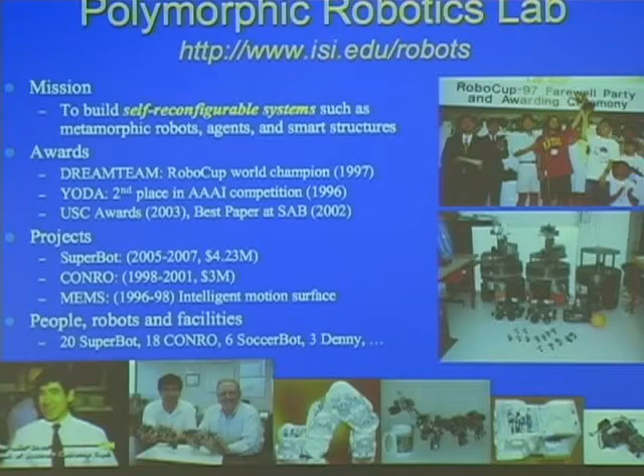In the past we've done some interesting work. One example, shown in the picture, the middle guy is a robot we call YODA that does indoor navigation. In 1996, it showed up in Alan Alda's Scientific American Frontiers by winning 2nd place in a national robotics competition.

This medium-sized one is the soccer robot series - autonomous systems that play soccer against each other. In 1997, our team, which we called Dream Team, won the World Championship in Nagoya, Japan. I'm going to show you a short movie of that.

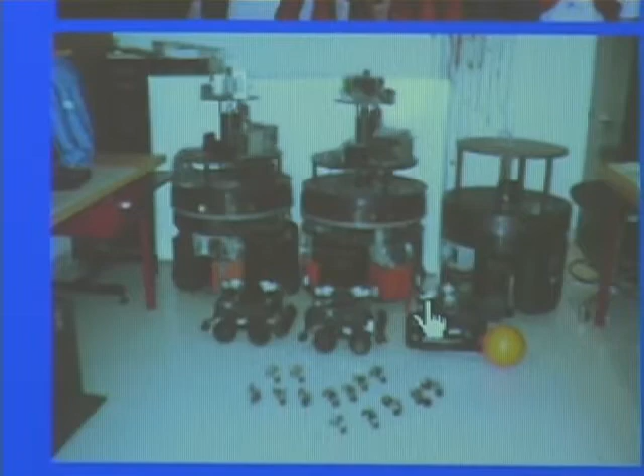The little guys are the reconfigurable modules, an early version, and then we have a bigger one, which is the one you see on the table.

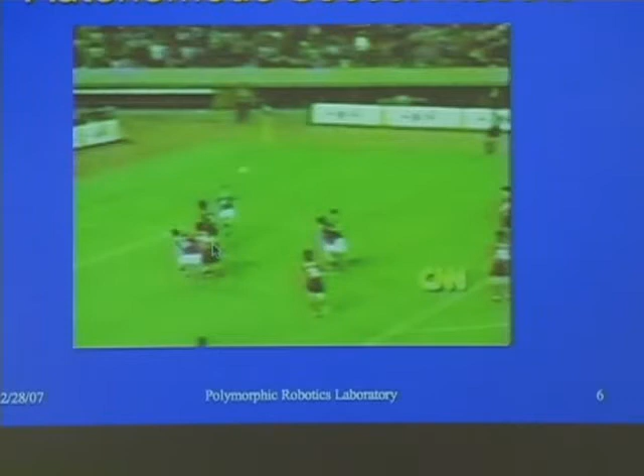So first, the soccer robots. Do we have sound? I figure Google should have everything here. Yeah, that last one, thanks. You might want to start over again. Yeah, that's as high as I can get.

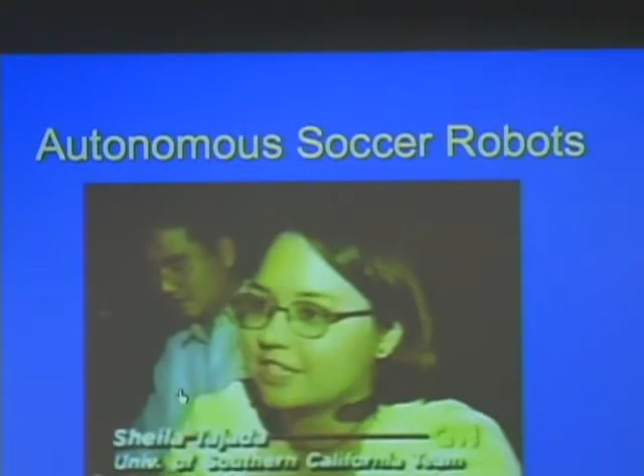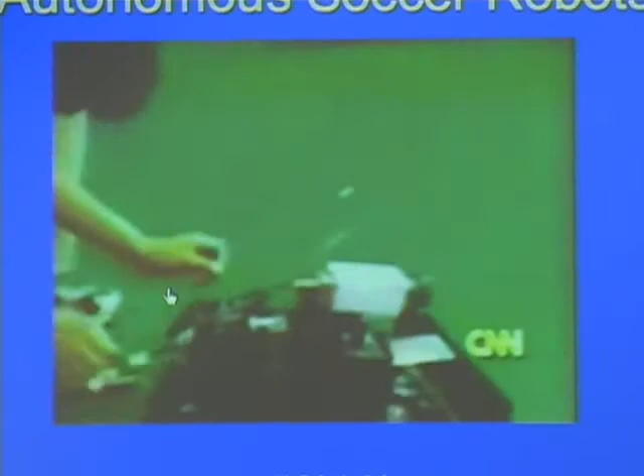Those are not robots, by the way - CNN did this. After we won the world championship that year, we had 8 graduate students and 5 robots. These 5 robots all have cameras and decision-making capabilities. The field is about half the size of this room, 8 meters by 5 meters. They're green, the 2 goals are colored one yellow and one blue, the floor is green, the wall is white, and the ball is red. You turn on the power, blow a whistle, and they start hitting each other. That year we scored 9 goals out of 12 in the entire tournament - unfortunately 2 of those 9 were against ourselves, so you can see there were problems.

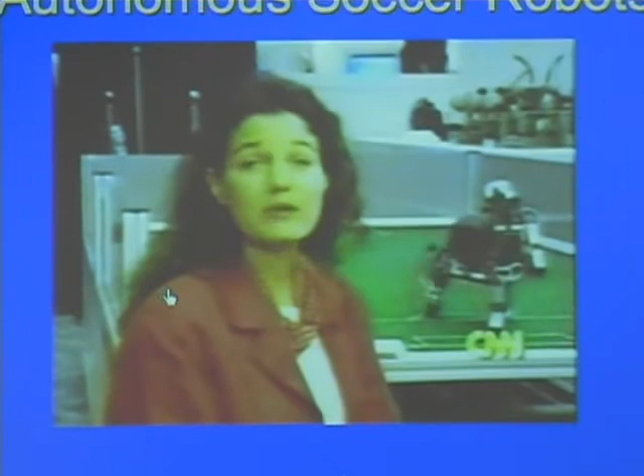So that was 1997. After that we started working on self-reconfigurable robots. What do I mean by self-reconfigurable robots? These are robots that are eventually able to change their shape and size by themselves, depending on the environment and task you want them to do. So you can imagine such a robot sees a pipe or a very narrow space, and it can become a snake to go through it.

Afterwards, if they need to climb stairs, obstacles, or slopes, they can grow legs. I mean, literally grow legs. And if the terrain is downhill, they can simply become a ball and roll.

Sometimes we joke with our friends that we're trying to build a baby version of the T-1000 robot from Terminator 2. Of course, we don't have the liquid metal. All we have are the small modules you see here.

And the possible applications could be space, military application, underwater, and many other possibilities. So one possible application is for space.

Right now, NASA is building a lot of robots for different purposes. You've got to have a rover. You have robots specially designed to climb very steep slopes, and you have this arm that sticks out and moves things around. But even though they've been successful in the past, we don't want to continually build too many special robots, because there are so many things to do up there on the moon, on Mars.

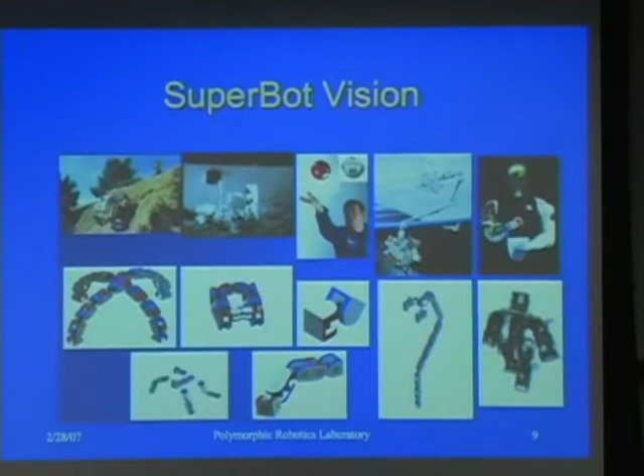So here is a picture of that vision for space. On the left-hand side, there is a robot trying to climb a really steep slope. There's a rover on the moon, and there's something flying inside the space shuttle. You can take one of these modules, put a little jet on it, and then they can fly in the microgravity environment.

And also, you can put this all together with a long chain, and then they can act like a long arm. You can also arrange them into a human figure to look like an astronaut and assist astronauts.

Our original goal—this Superbot project was started in 2004, sponsored by NASA—the original goal was to be able to build 100 of these modules, pack them into a very tight configuration, like you see on the left side, the cartoon there.

And have them fly over a desert and drop this package on the desert. Then they wake up and reconfigure into a rolling track, find a sand dune nearby, and roll to the sand dune. At the bottom of the sand dune, they reconfigure into a legged configuration and climb the sand dune. Once on top of the sand dune, they reconfigure into a little structure you see there to protect a group of seeds with a little water and soil inside, and sit there for a week or two until the seeds sprout into little plants.

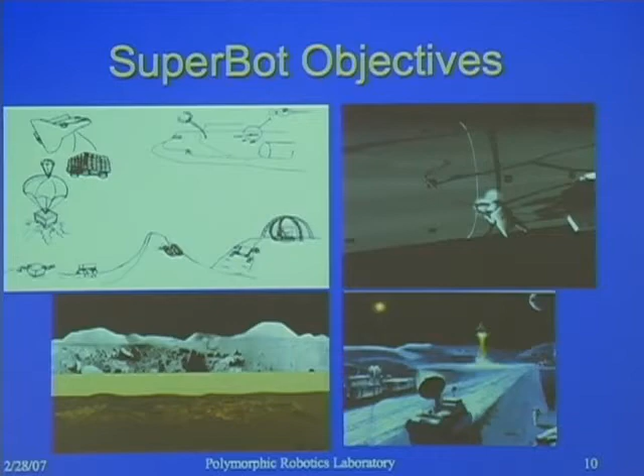I thought it's interesting to show you the original implementation. Up to now, we have completed 20 modules. We have done a lot of multifunctional demos, and you will see the movies I'm going to show you. We've also done some limited version of self-reconfiguration. I'm going to show you some of those little by little, and if you have a question, you can ask me.

This is the 20 modules all together, fresh out of press and all assembled. We took a picture before we contaminate them or make them dirty.

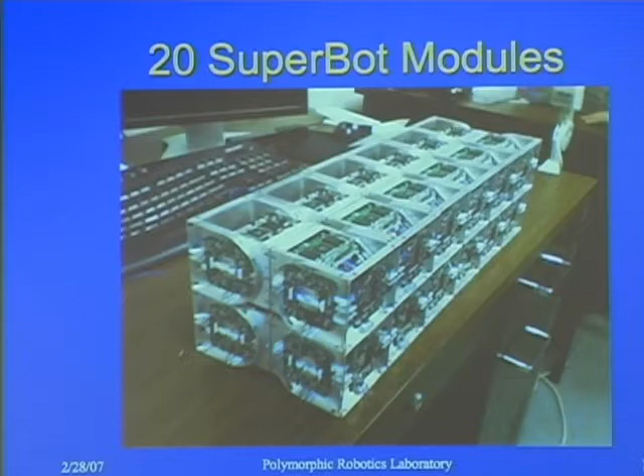Inside each module, for example, it has 3 degrees of freedom. You can do pitch and yaw - I never remember which one's pitch and which one's yaw. The middle one you can roll. The middle rotation right now allows continuous roll, but we can only control it for about 270 degrees of controlled movement. Both of the other sides can move plus or minus 90 degrees.

These modules also have 6 connectors, including one connector in the middle that you can see. You have front connector, back connector, up, down, left, right. So other modules can dock, connect, and form different shapes.

It has 2 little microcontrollers, Atmega 128, running a C program. A lot of you are interested in the software here - we're running a small real-time operating system called AVRX, and you're able to program real-time tasks with multi-threads. You can have one task control motor 1, and another task control communication.

Each of the connectors has infrared communication, allowing them to talk to each other and also allowing them to see each other at some distance. All 6 connectors have this capability, so you can talk to up to 6 neighbors if you want. They also have internal sensors - it can sense orientation with 3D accelerometers inside, and also have current sensors, voltage sensors, and other sensors in it.

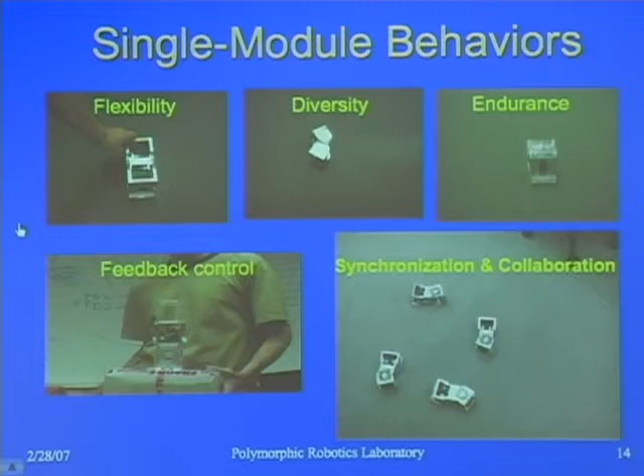One module, in some sense, is already a complete robot because they can move forward, backwards, left, right, upside down, or any way you want. They have their own batteries, control, and everything - sensors, actuators, and controls are all there.

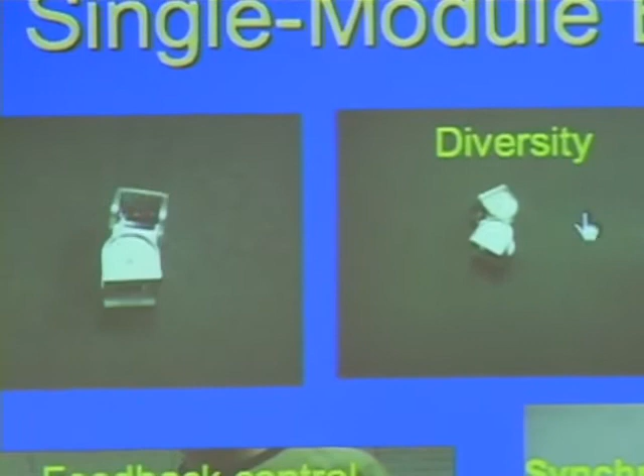Some gaits are funny. For example, you can have a genetically algorithm discovered what we call a drunken movement, which looks like someone had too much to drink - and that was Jacob kicking it. This shows that a single module can be programmed to do a lot of different activities.

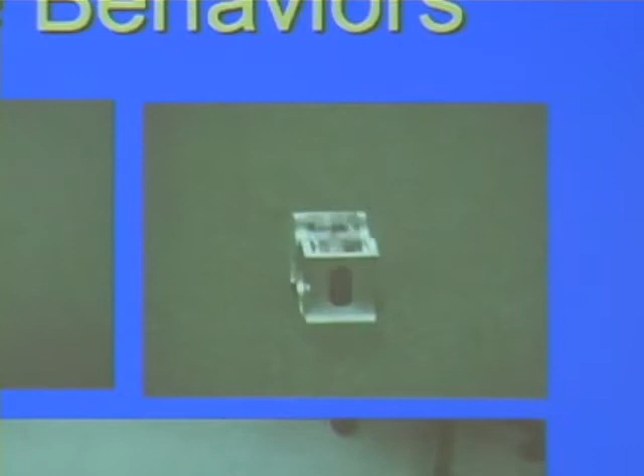We also use onboard batteries. One time we had the modules running back and forth in the hallway for about 700 meters, on battery, using iPod batteries - 4 iPod batteries. That lasted a little bit more than 2 hours, and less than 3, probably.

As I mentioned earlier, you can have sensors. In this case, Mike tried to drink some Coke - he put a cup on top of this module and wrote a program so that no matter how you tilt the base, it never spills. That's great for waiters delivering food in a restaurant, but terrible when you're trying to drink it because the cup doesn't tilt. He has another movie showing that when you try to drink it, it's really difficult. This is an example of feedback control in a single module.

They can also synchronize and collaborate if you let them communicate with each other. In this case, 4 modules are doing what we call synchronized swimming, just having them do the same thing. We might have a better movie in the future to show that.

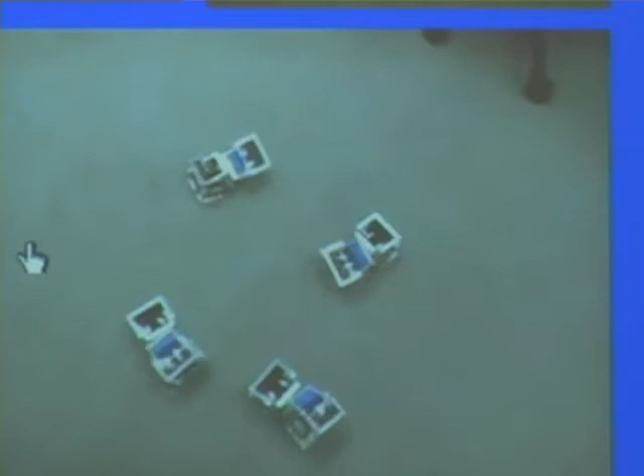Now, those are the single modules. Now imagine you connect them together. What kind of a configuration can you come up with? In principle, it's basically endless.

First of all, you can chain them together into a long snake, if you like. Or you can have them grow legs on the side, like a centipede, with as many legs as you want. And you can have trees, arbitrary trees.

You can have loops by connecting them into a loop, and then on the side of the loop you can have legs if you wanted, to make an octopus. You make a loop in the middle, get 8 legs on the side, and you get an octopus.

Now, by manually configuring these different setups - say today you wanted to program a 6-legged creature - you basically grab maybe 9 of these modules, connect them, load your program so each module runs the same program, and you have the remote control here.

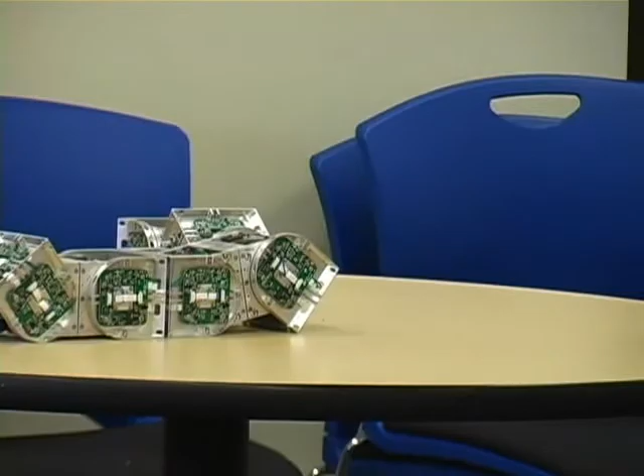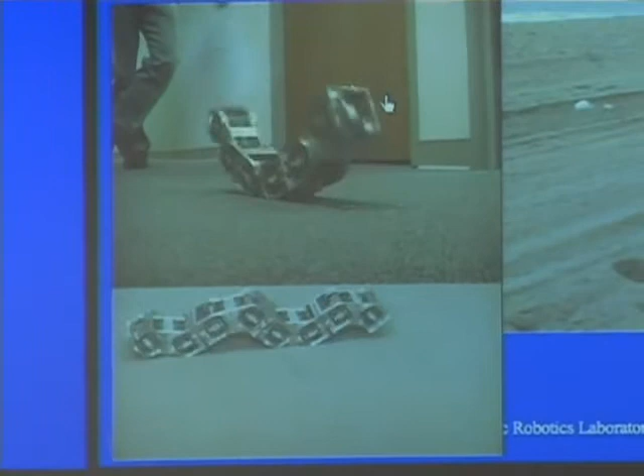So you see, these are the longer ones. One case is a longer caterpillar. This is a stronger caterpillar with a larger wave.

This is something we did at the Marina del Rey beach. We get tired of indoor programming, so we go out.

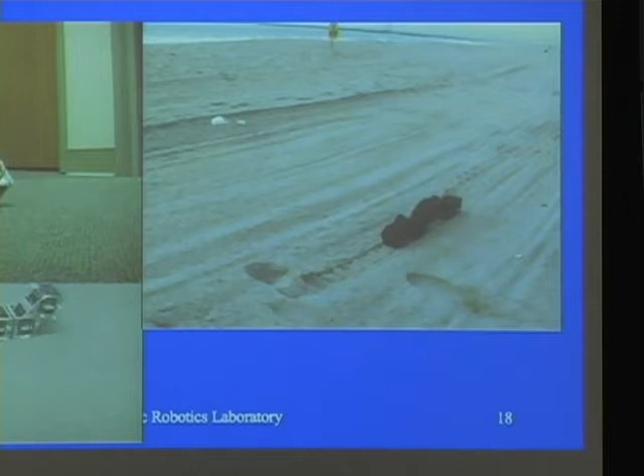Yeah. So you see that it makes interesting footprints along the way.

Mike also experienced, when he was doing this on the beach, seagulls would come and be curious about what this is, and whether they could eat it. So it was funny.

That's the sound of the beach. And also the wind.

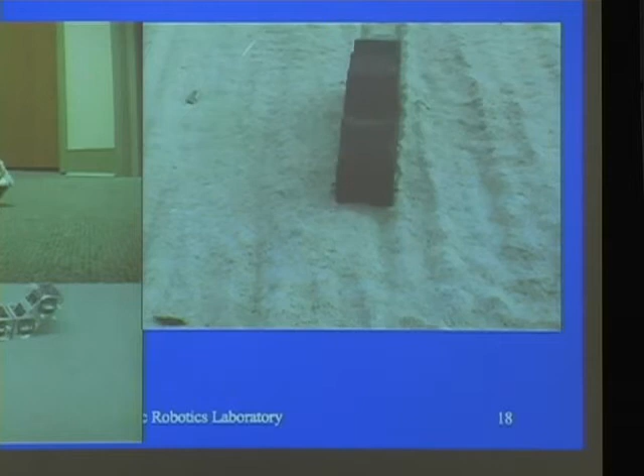So the black skin is actually to prevent sand from getting into the module. And it's a very high-tech thing - it's actually just ladies' socks. We put it on.

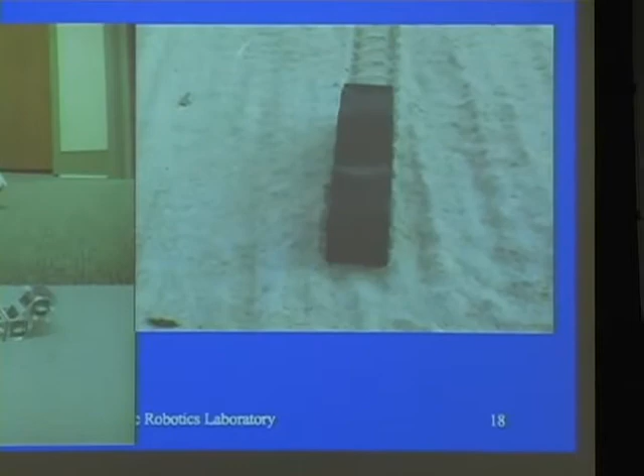Then there are other locomotions for chain configuration, or if you have a T configuration with 2 legs in the front and a tail. I'll show you - one thing about the chain is you can move sideways.

And also you can move like a butterfly.

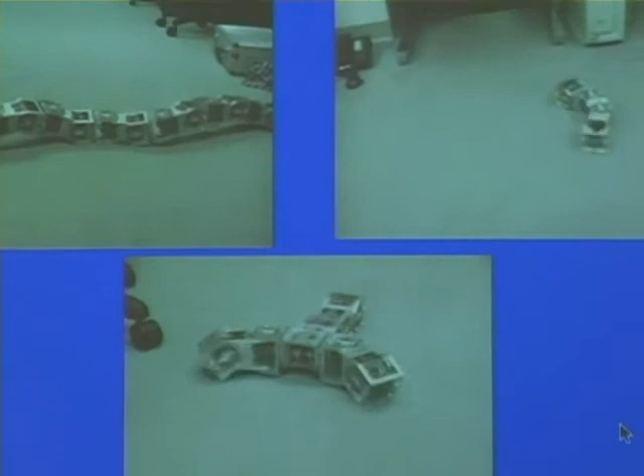This is the T configuration, basically 2 legs in the front with a little tail. It looks like a scorpion. And if you have a longer tail, the tail can certainly stand up trying to do something to you.

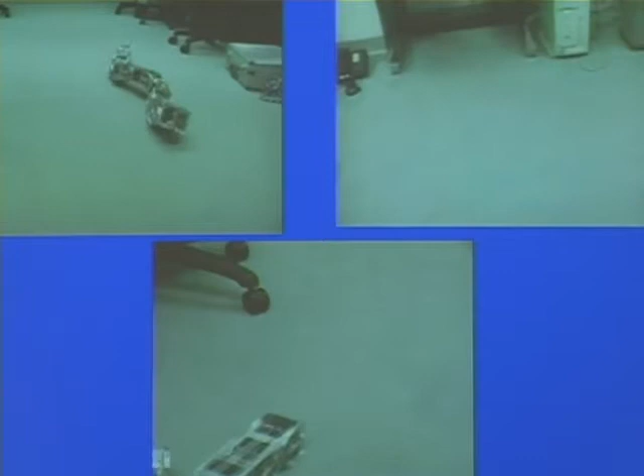One thing we talked about but never did: this could be used by, say, law enforcement. If you wanted to arrest some bad guys, you let these robots quickly surround the body and tie it up, and you're under arrest. So whatever.

And they can also climb, as I mentioned, steep slopes. This is indoor, maybe close to a 45-degree angle on a carpet. Because the center of gravity is so low, they can climb really steep slopes.

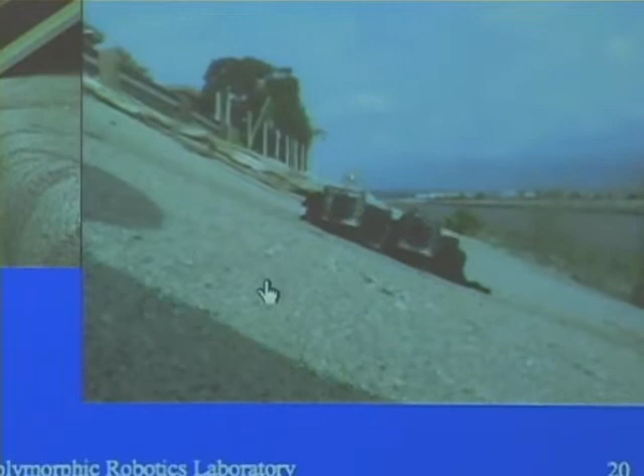We also did it in LA, at a creek - Florence Creek or whatever, you know the LA River, sometimes it dries up and there's a bank about 45 degrees. So we put our robots there and had them climb.

All this is because we have an agreement with NASA. We have to demonstrate these modules will be able to run on battery for 1 kilometer, climb really steep slopes, and even sand dunes. So we're working on that.

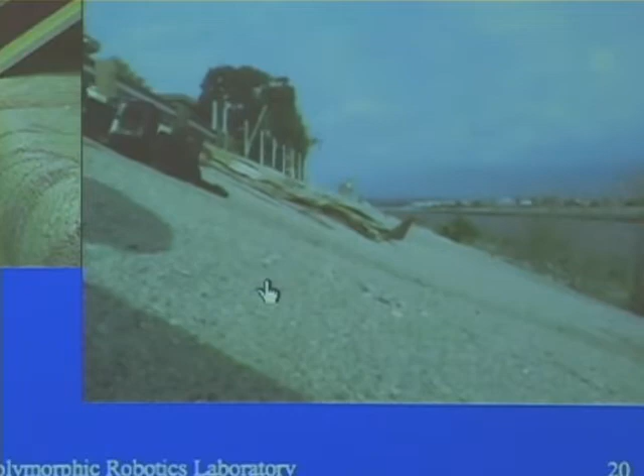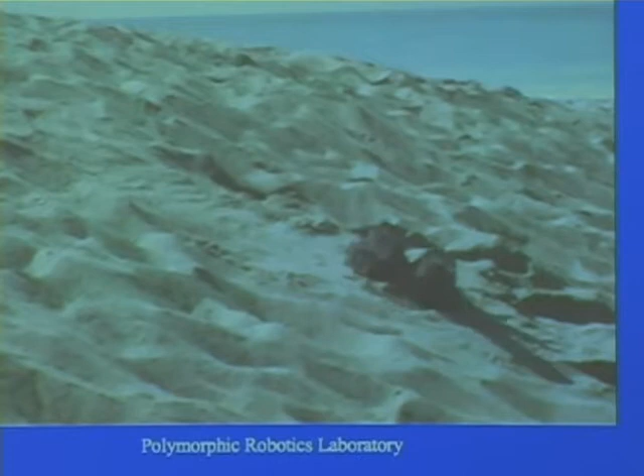This is a sand dune climb, again on the beach. It's not too successful because the leg digs into the sand, so it doesn't move the body too much. We're thinking of all sorts of ways to improve it so eventually it can climb a sand dune.

There's one nice sand dune park in Manhattan Beach Park - I don't know if you know about that place. And eventually, we're going to be able to climb that sand dune there.

This is also using a caterpillar trying to climb the sand dune. And again, because the weight and the sand softness, it doesn't make too much progress.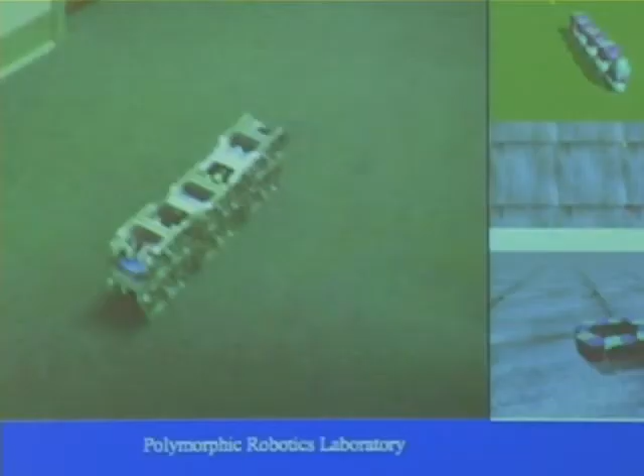And for faster movement, rolling track is an interesting one. So in this movie, it's a 6-module configured into a loop, stand up and roll.

Harris is in charge of that, and they're working hard to make it better, to make it smoother and run faster. In the future, we should be taking these to maybe a running field with 400 meters, have them run 2.5 circles, and then we deliver what we promised to NASA.

So an interesting part of the rolling track is they should be able to stand up if in case they fall down. You look carefully how it stands up. And then they can turn along the way. There's another way to stand up. And then keep going, okay?

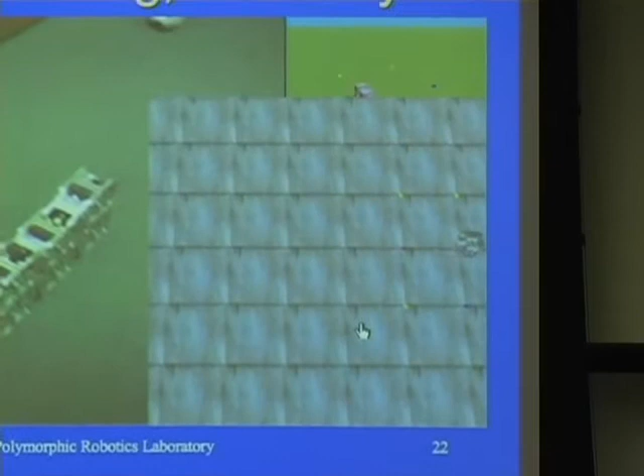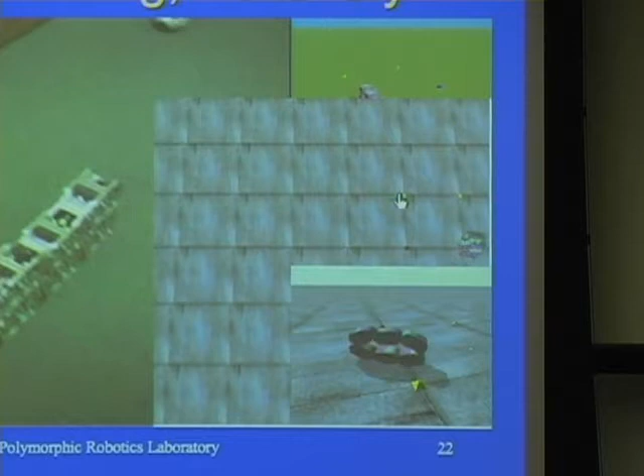And also, in order to be able to control their moving direction, you can put 2 rolling tracks together. For some reason, I can only click once. I don't know, okay, we'll see that later.

This is another interesting behavior. You can have a rope between 2 buildings, and this robot is able to climb from one end to the other. Jacob has been working on this too. So this is a movie that we did on the roof of our parking lot.

You see that they have little grabbers. Right now, it's just 2 tubes that they can twist, hold on to it, and move the other leg. And let it go, and twist the other one, let it go, like this. Go. And we're hoping that by having the rope vertical, it will be able to climb up, to climb a building, or go down to do something else.

That's the traffic you hear on the Lincoln Avenue.

Okay, for tree-shaped robots, you can certainly have something like human legs. Not quite human legs - our leg bends this way, this leg bends sideways. But it's tough to have it balance and then move along.

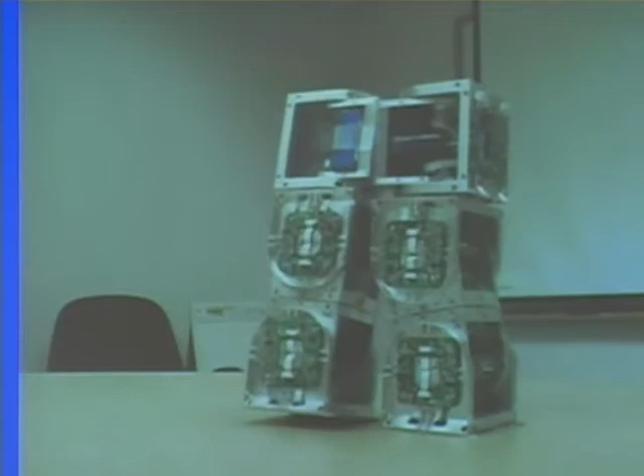And you can have more legs. This is a 6-legged robot, and then it moves a little bit similar to the Star Wars thing, the big robots thing.

And I also mentioned they have internal sensors. You already saw this movie. And these 2 movies show that they will be able to stand up by themselves.

Each module can lift, is powerful enough to lift the other 2 modules if you have them straight. However, it's not strong enough to lift 3, 4, or 5. So in order to stand up with 4 or 5 modules without falling down, they have to constantly use the center of gravity information to allow them to move in a funny way to stand up. That's the 2 movies that show that.

You can also have an arbitrary tree with 1 root. It's like you're standing on 1 leg. Every module is reporting to each other their center of gravity information, and then they compute the global center of gravity, and then are able to move and stand on that 1 leg.

So these are useful for the future when you work on very tough terrain and need to be able to stand on one leg and move in a certain way.

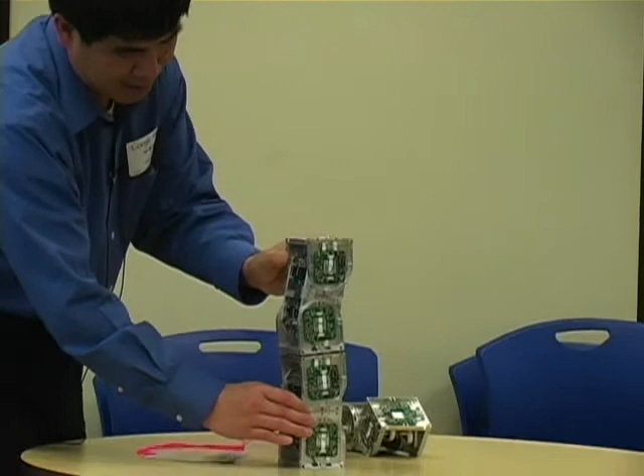You see, they are very careful because it's not easy to have them stand on one side. So if I put them like this, if I don't touch them, it will fall down easily. Because right now they're not applying force - this is okay. But if you touch it, it will fall down.

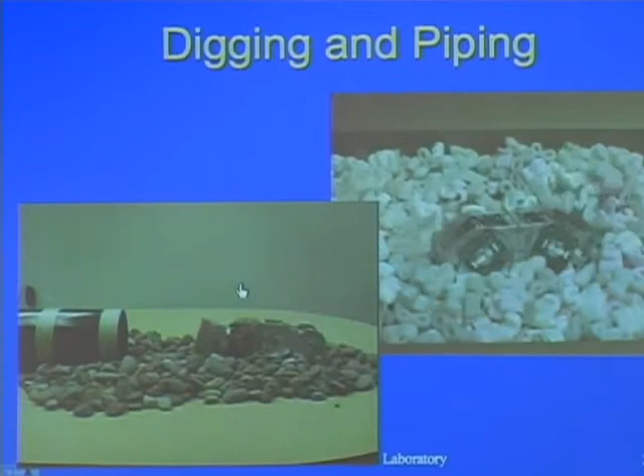They can also do other interesting things, like bury themselves into a pile of peanuts for packaging, and go through rubble, and then into a pipe, and after the pipe, climb a little slope.

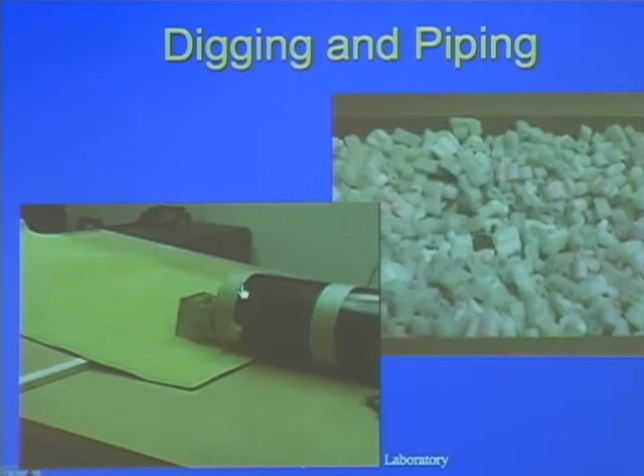We tried that bury thing on the beach. I dug and it didn't go too deep because when you're coming this way, the sand is coming back. And so we have to think more.

And then we also want them to work on soft objects. This is a gait that's designed to be able to roll on a net. So it needs a little help by providing little grippers at the end of the thing. So right now we just use a little help.

And you will see one side roll, the other side roll, and the middle roll, and keep rolling on the net. And you can apply the same gait on the net with a little help.

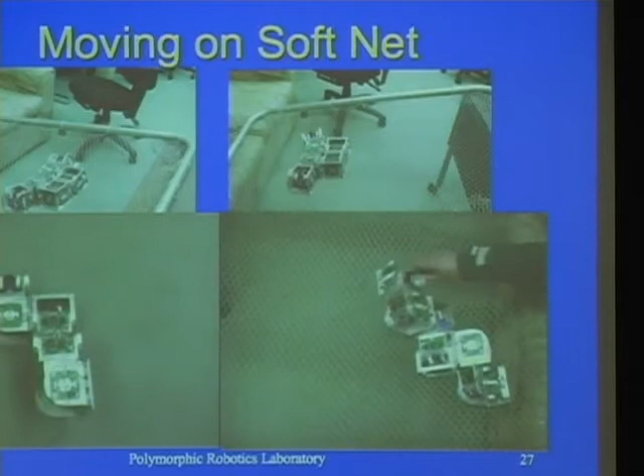By the way, people download this movie, and then someone even added music to it. There's really nice music, synchronized with all this movement. I don't know how to do that.

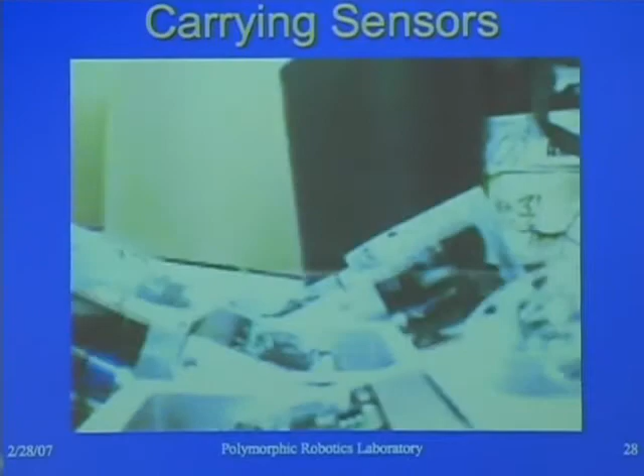So that just gives you a flavor of how eventually it will be able to move on the net, and also carry sensors. One interesting feature of these robots is, suppose you have some special tools and you want to be able to have the robots carry it. As long as that tool has a standard connector, you can connect to it.

So we have a part that has a little camera and a wireless communication. You can connect to them, and then they will talk to this module through the infrared, and they become part of the robots. Suppose you have a screwdriver or a glove, whatever, and you can put it on with the standard connector. Then it has a special module that you can do things with.

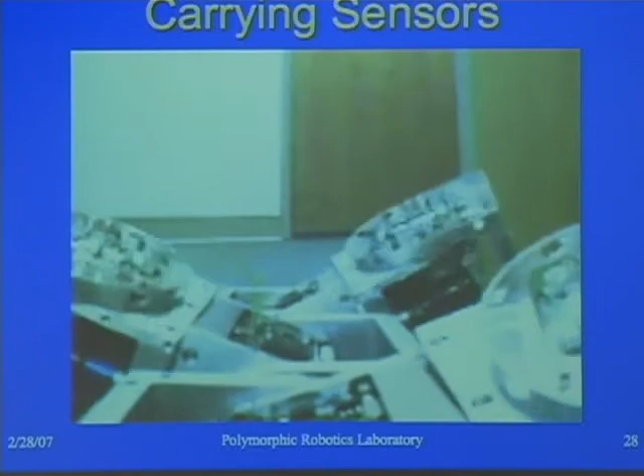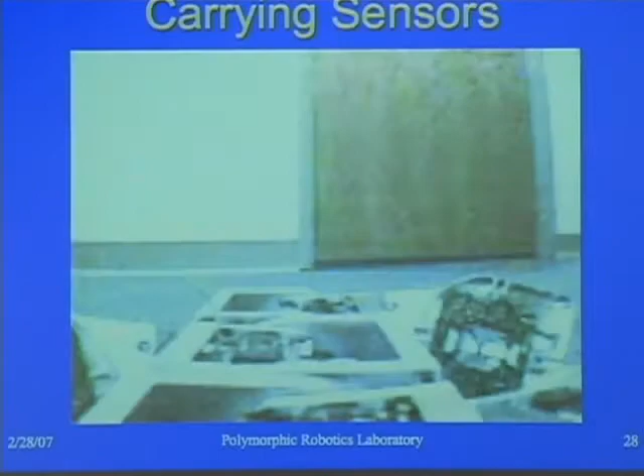So that is the climbing configuration you saw earlier, with the part at the back of the robots. And this is what the robot sees when it moves. You can send the command to the robots to turn left and right. In other words, you can leave the robot somewhere else, and you're sitting in this room, and you see what the robot sees, and you can control it. Kind of a remote control thing.

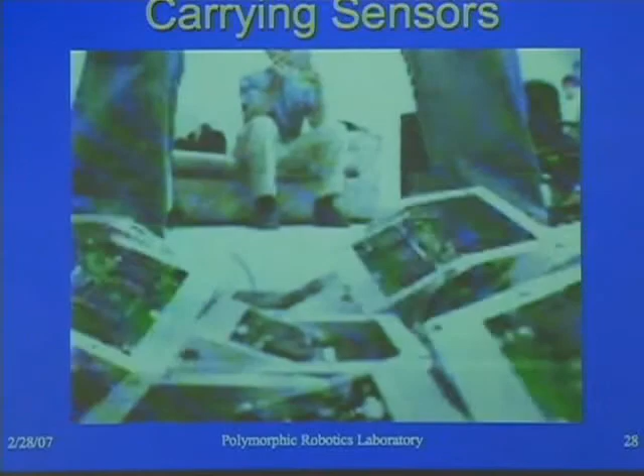And you see Jacob sits there. I think that's Mike, right? You sit, Jacob sits on the sofa. That two-leg one is who? Mike. Okay, you can see sometimes we abuse them.

Okay, so carrying a payload is also a challenging task because this robot has a lot of motors by itself. One of the challenges people always ask us is how much weight can you carry? So we figured out one possibility that can carry a lot of weight.

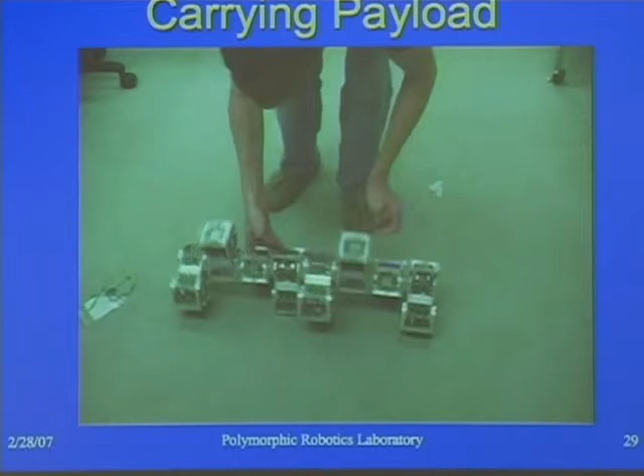So this is a way. You put your payload into a long thin cylinder maybe, and you put the SuperBot modules along that cylinder and have them roll like that. And you see here.

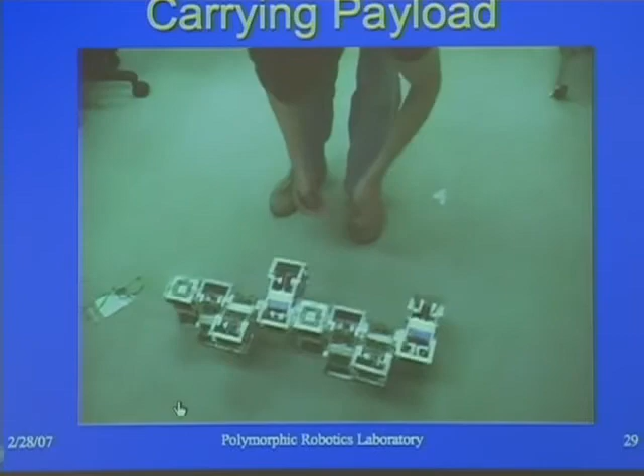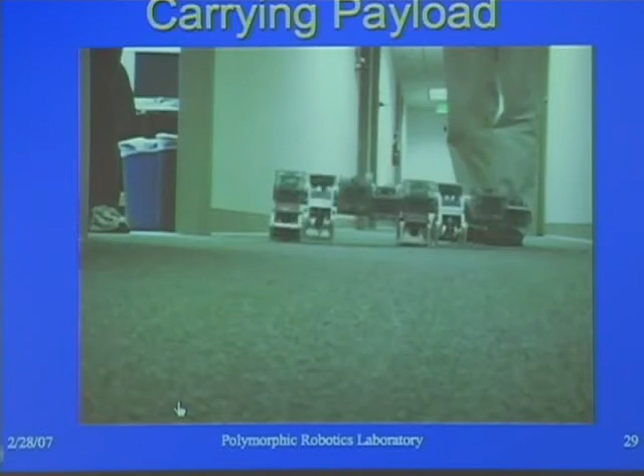Right now, this configuration is all SuperBot modules in it. But you can have the cylinder in the middle with the payload, and then connect the modules on the side, as many as you want, and have them roll. So that way, we hope they can at least carry their own weight equivalent to their body weight.

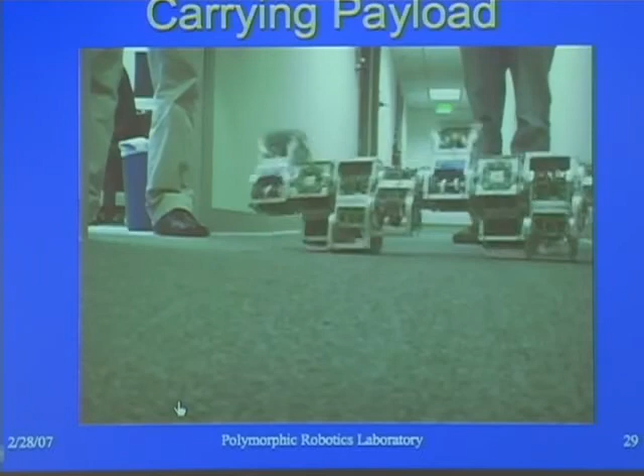I cannot imagine what this looks like. I mean, there's no creature that does this thing.

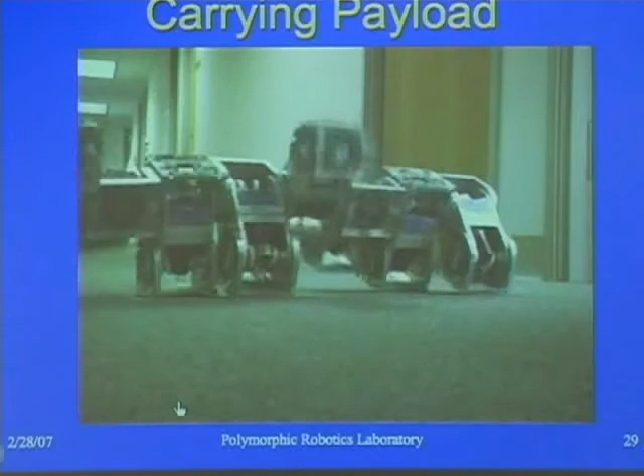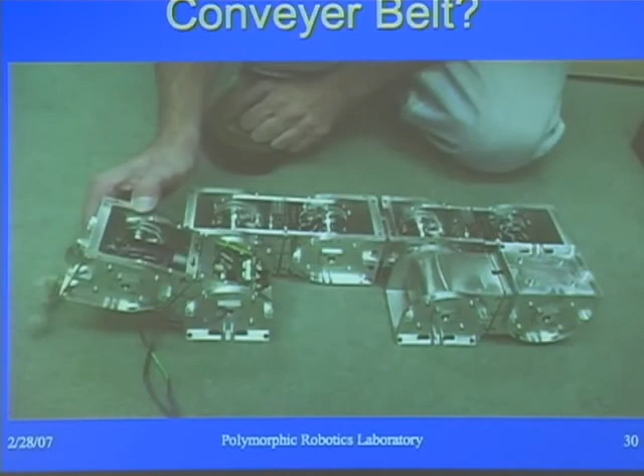Okay, so you can also use it as a conveyor belt, transferring dirt from one side to the other. This we have done by hand. We're going to program this and have them moving dirt from one side to the other, or some other objects from one side to the other. This is just a demonstration that it is possible, and you can easily program it to do such a thing.

Now, the stuff I showed you so far is what we call multifunctional, based on whatever configuration you give them, and each configuration can do different things, and it can easily do many tasks.

Now, the question is, how do they reconfigure? Here is one simulation, configuring from one long chain to become a four-legged robot.

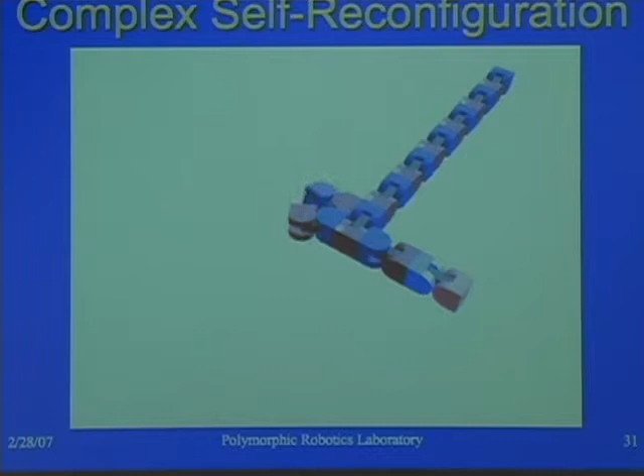They have to dock, de-dock, dock, doing this kind of thing, and you have to plan them, what is the best way to do such a thing. You have an initial configuration, you have a target configuration, and what are the minimum number of actions you take to allow them to change from one shape to the other.

Okay, that's a simulation. Now, in reality, first of all, you have to find your buddies, right? Say you wanted to become a bigger body, and two guys want to come together. They should be able to find each other, so first of all, they have to search.

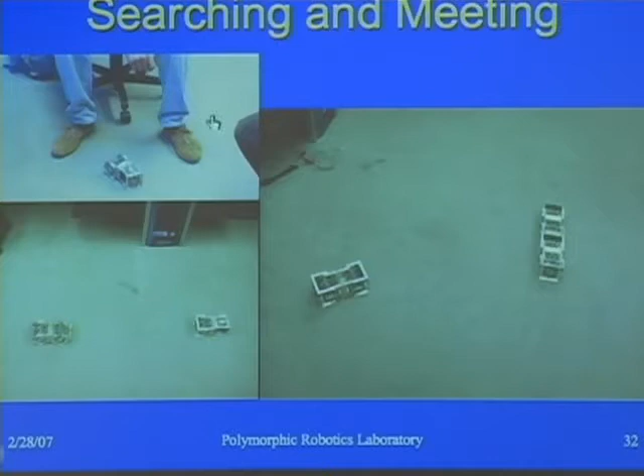They use their infrared to look for buddies, for example. This is one way to be able to look around. And two guys together can use those gaits. One guy is looking, the other one is standing still, just emitting the infrared signal, saying, I'm here, come. The other guy comes towards you.

And then also, if you don't know who they are or where they are, you have to do a little search. This movie shows one robot with two modules turning around, sending signals, trying to say, is anybody there? Is anybody there? And then if someone receives that signal, it should be able to reply, says, yes, I'm here. So then it will go. You see, it receives a signal, adjusts the direction, and then moves towards it.

I read somewhere on the internet, there's one guy who specifically liked this movie, saying he felt sympathetic for this little guy trying to connect with its buddies.

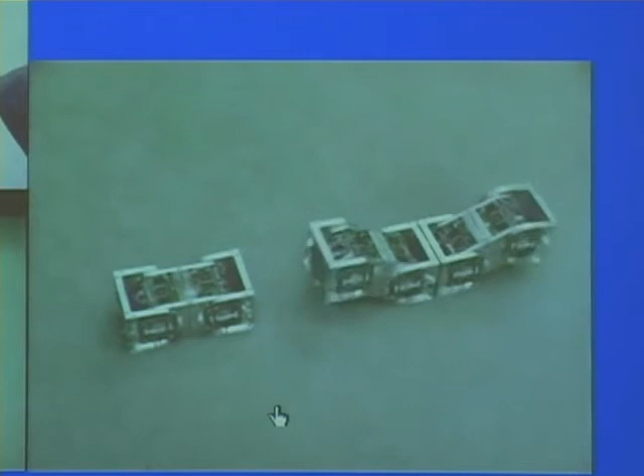So, the first step to reconfiguration is to be able to find each other and come together to do things. Also, when you have a bigger robot, if you wanted to separate them and cut that leg off, or cut the head off, can they still survive? That's the question. So we call them resilient to shape changes.

In these robots, we deliberately cut the body in half. The front part says, boy, I used to have someone behind me, but not anymore. It looks at its own current body and says, I only have 2 legs, therefore I should do a butterfly stroke. So it moves like a butterfly now. The back part also wakes up when it times out waiting for the message to return, and it looks and says, I used to have someone in front of me, but not anymore.

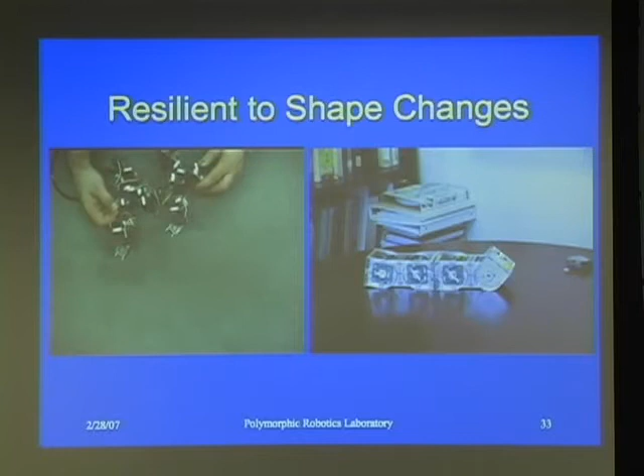My current body has 2 legs, therefore I do a butterfly. Now you can put them back together again. You can even swap the upper body with the lower body, and they will stop again and say, look, our body changed again, what is the best way to move? Then it will switch back to the 4-leg movement.

So we often tell our kids, don't do that at home to yourself, don't cut. Basically, in these robots, you can literally cut the head off, and they're still able to do things. They will not die.

Another illustration is, it depends on how things are connected, they will do different behaviors. You saw it on the left-hand side. In this movie, we're trying to show when the 2 modules are connected like this.

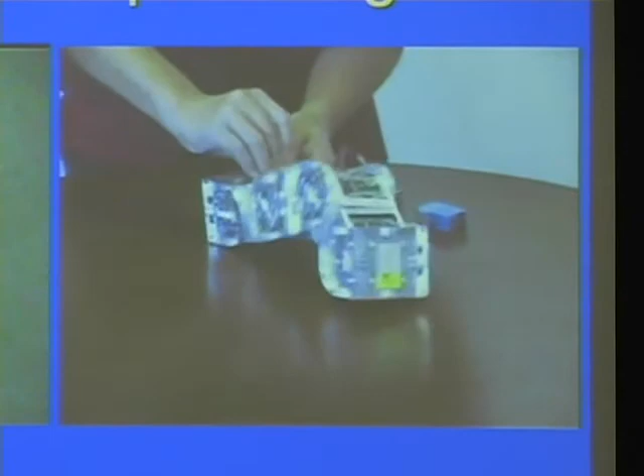But as soon as I turn on this one as well, now the 2 modules talk to each other, and they're doing a butterfly. At the time we made that movie, we hadn't gotten the radio control yet, that's why it was manual. And then it becomes something we call a butterfly stroke.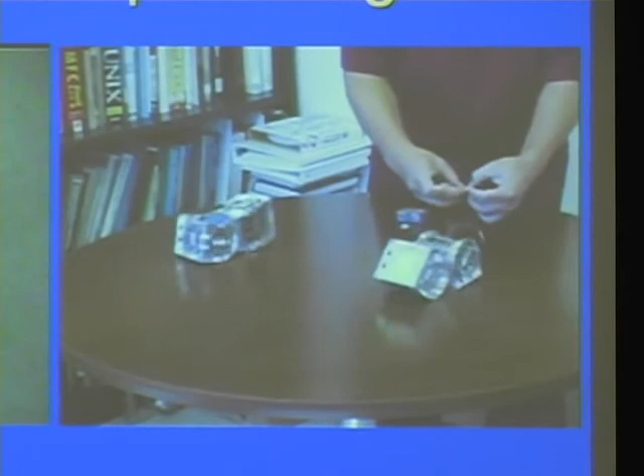So now, if I turn them and take them apart, we'll go back to the original individual behaviors. This one keeps doing sidewinder, and this one will become its own action. So this little demonstration shows the modules are totally autonomous, but at the same time, when they are working together, they can collaborate among themselves to do this.

So there are even more striking capabilities. Say this is an early version of a smaller module. You can start with 3 small robots and dynamically connect them, and they become a single one. This starts with a sidewinder. If you take a piece from the body and connect it to the side, that piece will become a leg immediately. Then you keep doing that, taking a piece from the body, adding another leg, until they have 4 legs, and now they can move along by themselves.

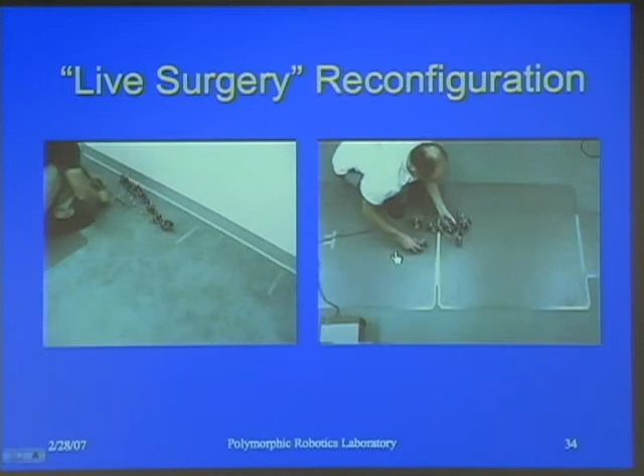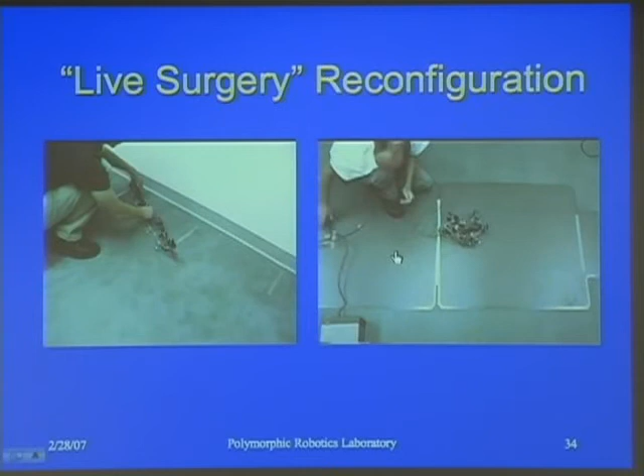This is something we call live surgery, in the sense that you don't need to shut them down. You can rearrange the body parts when you want. Now you have 4 legs, you can go. The reason they become a leg is because everybody is constantly detecting how they connect to their neighbors, to conclude where they are in the body. Depending on the location in the body, they decide what to do by themselves.

Okay, now a little bit technical. This is only maybe 5 to 10 minutes. I will show you a glimpse of what is inside the software.

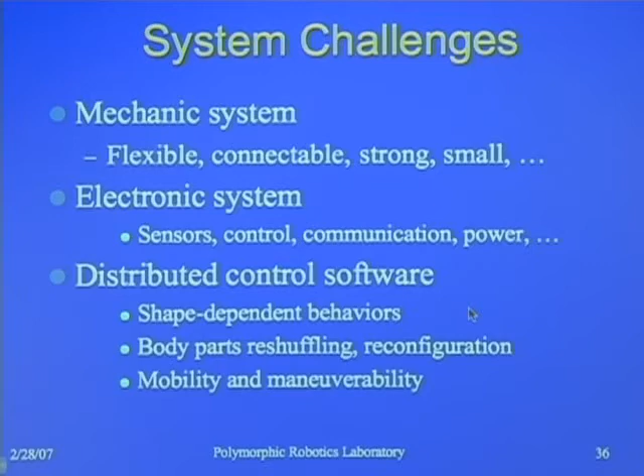For this kind of a system, you have to consider 3 big areas: mechanics systems, how the things are connected, electronics, and then the distributed control. For you guys, maybe the distributed control is a little more interesting because it could do shape-dependent behavior, and body parts can reshuffle, reconfigure, and also they can do mobile movement and possibly in the future manipulation.

So from a software control point of view, here are the list of challenges that you have to address before you can write a good program for these robots.

First of all, there is no fixed brain module for these robots. You can cut the head off, and somewhere else will take over. Furthermore, there's no even global unique identifiers. This is something very unique about these robots.

Any PC or any system you open up, every component's got to have an ID. On the Internet, everybody has to have an IP address. However, in a biological system, the little cells come and go, they die, whatever. I don't think they have names, yet they always come together and manage to do things great together. That's why we were pushing ourselves - we didn't even give them names, no name.

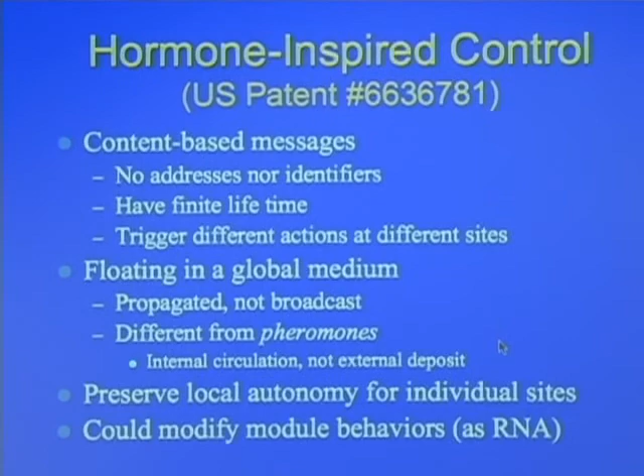So people have been working on these in different areas. If you imagine a different area, we have a different solution. But we're looking for one solution to allow them to handle many cases. So this is something we call digital hormone and hormone-inspired control.

This is an idea borrowed from the biological system. Imagine a biological system like myself - if someone scares me from behind, there are chemicals flooding into my blood causing different body parts to do different reactions.

So in this case, a hormone in this system is nothing but a content-based message. It has no identifier, no address. It's just floating inside, and it has a lifetime. And the key part is this message will trigger different actions at different places.

It really depends on who you are. So you have one message flood into your system - the legs will decide to jump, your mouth will decide to open, and your eyes will pop. They're all one signal, okay?

And they're different from broadcasting, because along the way of propagating, things get changed. There's no guarantee that everybody gets the same copy. And there's no external deposit like a pheromone.

I don't know if you're familiar with multi-agent control. Some people use pheromones trying to mimic the ants. When the ants go out to search for food, they deposit something along the way so the other ants can follow. In this case, everything is internal.

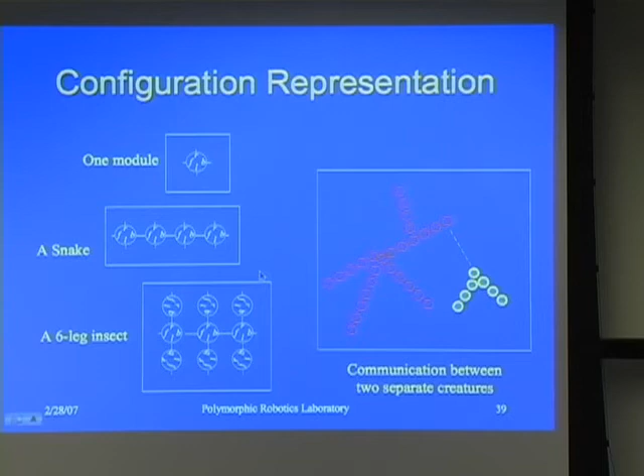Okay, so in 5 minutes I will show you some quick examples, and you can imagine how things are connected. These are the 1 module, 2 module, 4 module, and 6 module. Each module inside has an orientation: front, back, left, and right. Everybody runs the same program, and it depends on where they are to decide the actions. You can use them for many different purposes, such as communication, locomotion, and reconfiguration, etc.

So I can give you an example of how this works. Say you have 6 modules that want to move in a caterpillar motion. The easy way, or centralized way, is to send a message to every one of them and say, now go do it. But if you use this approach, you can send one message to your neighbor, just saying, here's what I'm doing, and you decide what you do. Then this message propagates, everybody selects their action, and they start doing things.

By the time the message goes to the very end, that guy says, I don't have any neighbors anymore. So because the topology is different, it decides to send a synchronization message back. When you receive that synchronization message, you look at your own action to see if you've finished or not. If you haven't finished, you hold that message until you finish, then you propagate it. By the time this signal gets back to the first guy, he says, OK, everybody has done their job. It's time for another wave, something like that.

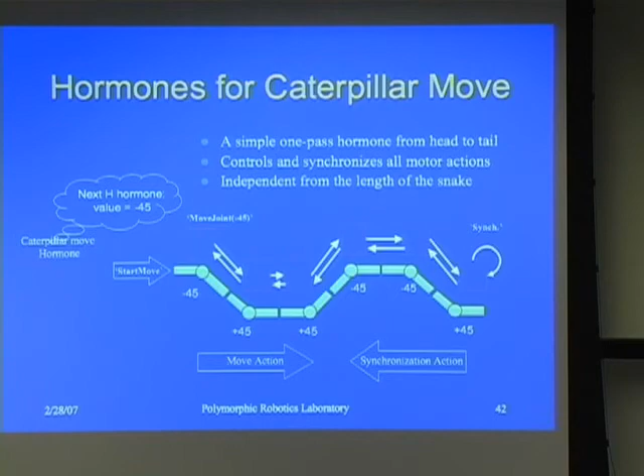So why bother doing these things? One advantage is you can cut the robots in half and you don't need to change the program — it will work the same way. Furthermore, you don't care how long the snake is. So these kinds of things are interesting.

This is another example of how things change from one 4-legged creature into a snake. What it does is the tail comes over to connect to one of the feet, then disconnects from the hip. So a leg becomes part of your tail. This new tail comes over, connects to another foot, disconnects the hip, and becomes a longer tail. You keep doing this until there's no more leg left, and then you become a snake. This is something you can do distributedly without any centralized control.

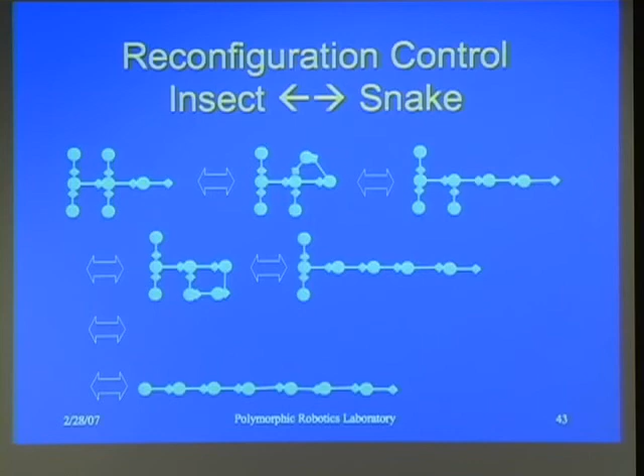I will not have time to tell you the details, but you can use this approach for many other purposes of distributed control, and other things you need to do.

And I will skip this. Application-wise, you can apply this principle to real biological systems — if you're interested, I'll tell you more about that — and also to swarms of robots, assembly in space, underwater robots, and self-healing systems.

So let me conclude. It's 1:05, so it's okay.

Self-reconfiguration is a very fundamental research topic. We always say it's a gold mine — you keep digging, and there are a lot of things that come out. It also has many possible applications. For example, search and rescue: when a building collapses, you want to send robots that can change shape and go anywhere they want, since fixed-shape robots might not be able to do that. Also homeland security, self-assembly in space, smart structures, and many other possibilities.

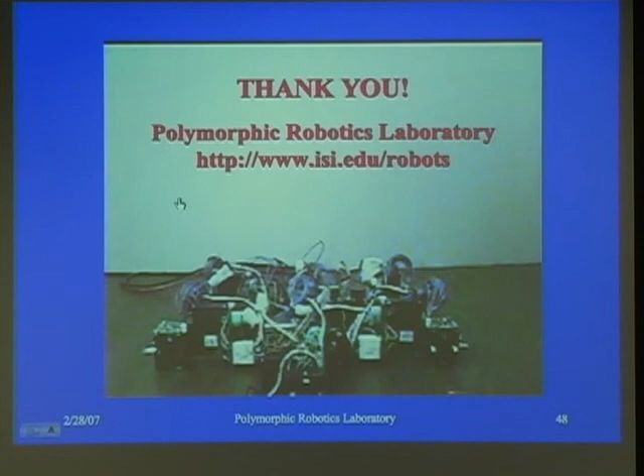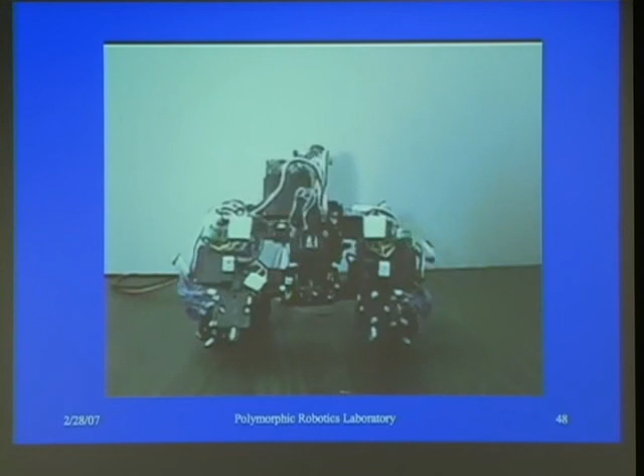So finally, I wanted to thank you for your attention. Here's a little robot. All right, so thank you very much. That's it.